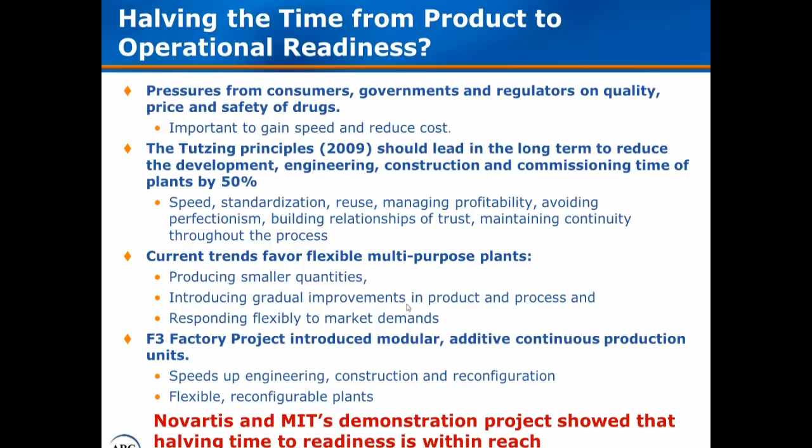Now, what will we be able to do today, right away? We need to get back one slide. If you can help me, please, with that. I'll take care of that, Valentin.

What we can do today is learn from the work that has been initiated by Dr. Thomas Tauchnitz at Sanofi. He published a vision in 2005 for integrated engineering, commissioning, construction, and operation. The principles he defined were that every asset information should be generated and maintained at one single location, that all trades during the project should work with the same up-to-date information, and existing knowledge should be reused where possible, which implied modular engineering methodologies.

I will not dwell on it, but there is a very sophisticated methodology defined by Mr. Tauchnitz that everyone can adopt. However, it takes a little bit of time to adopt it.

Another point that he came up with was that a risk assessment during the engineering can be very efficiently linked via requirements management to compliance management. So you design the plant, you identify the risks, and then you make a checklist of tests to do, and once these pass, you basically have the compliance in a single environment.

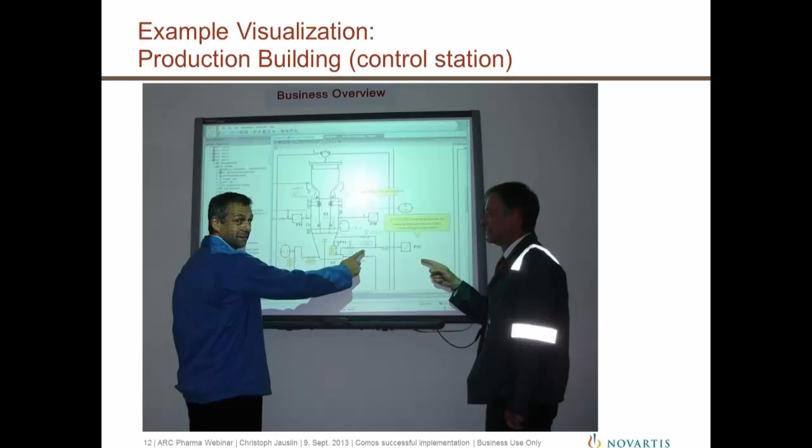I have an example here in production sites, what they are doing. They have such panels, such screens on the shop floor where they can have access to their data, and in this technology they can also do red lines, they can input commands, and are so in contact with the engineering department online. That's one of the examples.

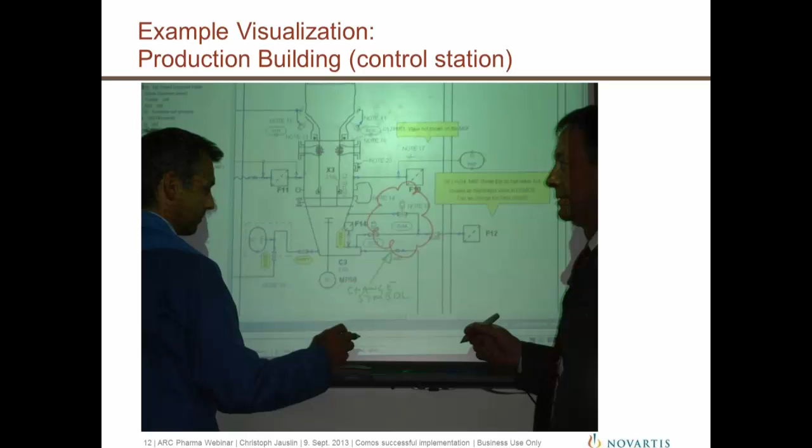Okay, now for going this electronic way, you have to change the way of working. Simplifying engineering workflow is one of the thematics, the reducing of the number of interfaces. You see here a very complex picture of an engineering workflow with all the documentation which have to be created, with all the disciplines, and what is possible with such an integrated platform is a much simpler picture.

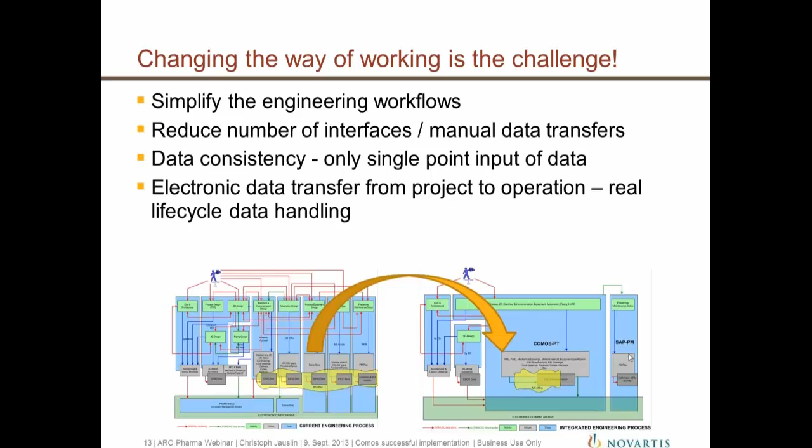You see here we have the Comos platform and we have the SAP beside for the maintenance. With such a concept, you can get data consistency. You have only a single point of input of data. Here you get the real integration with such a picture. But you need really to change the way of working.

What have we done? We have a centralized implementation. That means we have one database for all the sites. We have a global harmonized standard, so from China to California we are using the same data model. A very high integration level, minimum of interfaces, and with any rollout to sites, we try to migrate as much data as possible. If data are in electronic form, we can do it automatically. Otherwise, we do also redrafting in India.

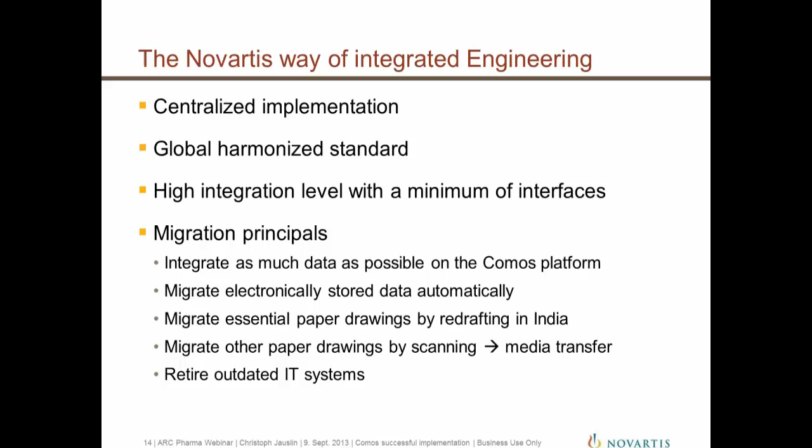Where we are at the moment, we have a lot of modules of Comos in use. So all the process things like equipment definitions, P&IDs, E&I with loop diagrams, HVAC, and then the modular technology, where I have some other slides. We have an SAP interface, and the full set is validated. We have an electronic signature possibility. That's all in. That's the engineering part, and we are then also using an integrated document management part, where we have also this qualification area, which I will explain a little later.

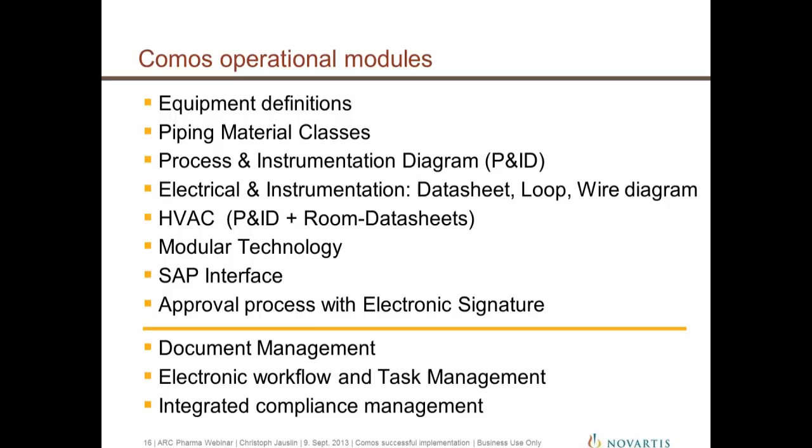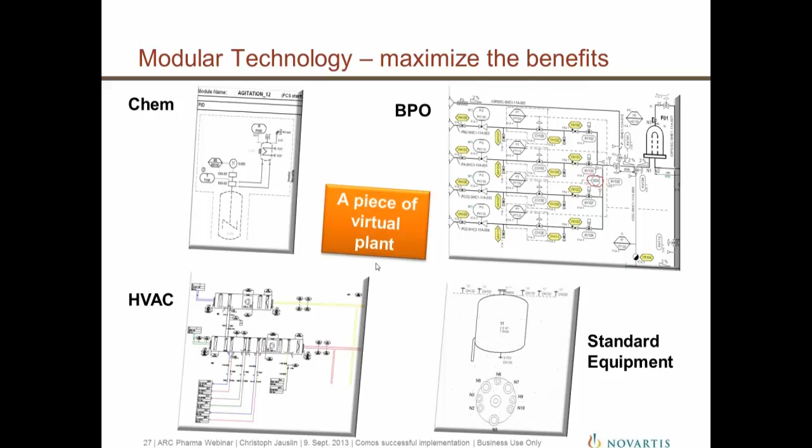As an example, we have one for the chemical part, a biotech part, HVAC, mechanical, so different areas, and we are not only defining a piece of graphics, we have data behind, we are defining assets, so in principle we have a piece of virtual plant. Looking at such a P&ID picture, it's not only these graphics, not only these components. For any of these components, we have an asset in the database and we have definitions beyond. So if we copy such a module, we are copying a piece of plant here on the right side. That is the high quality of these modules, process plus E&I in one box.

And also in the definition of such a module, you find the design specification, the functional specification, E&I specification, and it also ends with test documentation. That's a full set of such a module.

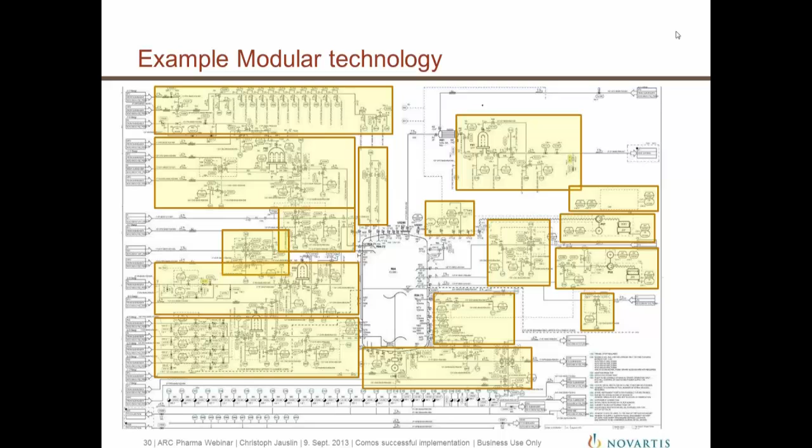And I have here one of the examples, a P&ID of this biotech project, and you can see with the next click how many modules were copied together here, and you see nearly everything on the drawing is out of a module. We have a main reactor and all the other parts are defined in modules. That is one of the best examples we have where module technology was really used in detail.

Okay. This thematic integration of qualification and compliance management into the platform as well.

You know, all the qualification tasks, it's really a lot of paper normally, and this paper effort we wanted to integrate into the same platform where we handle the engineering data. Having a look at the process, in the initiation and design part we had a really good tool. We could use modular technology. We have in all the phases, basic design, detailed design, our tools, and at the end of the process for maintaining the data we could also use the platform. But here, especially in the qualification area, we had nothing.

And so we started with a project to fill this big gap, and this integrated compliance management part was developed together with Siemens. So it's an extended document management. We have workflow-based processes, test plan management, and a so-called risk-based approach. This box, that is the extension PQM in COMOS, which is existent. We had also the part MROM, which we had to extend.

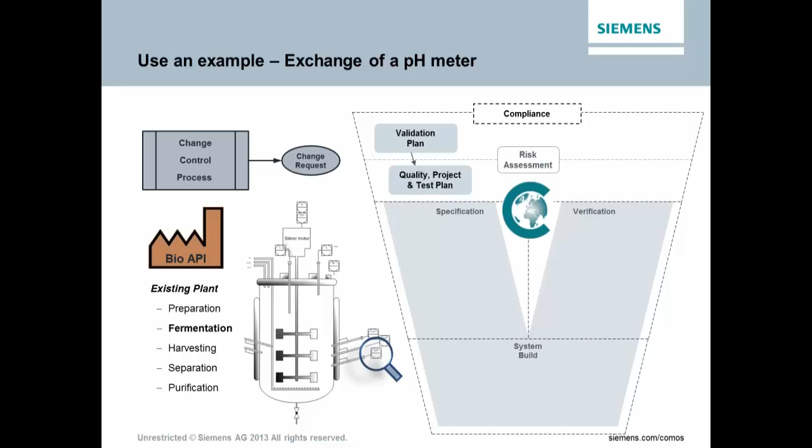To summarize a little bit, what is the challenge? We will start here to review a little bit, for example, in the bio API plant, and have a review to a fermentation, and what does it mean to exchange something here. For example, if the pH meter will be exchanged, for example, on a request from a change request, then you need to review first of all the specification if something needs to be rewritten, and if you only exchange something, obviously you need to implement and plan the implementation and the realization.

For example, exchange of a pH meter, you must do the exchange of this pH meter, and obviously you need to verify what you have done, and this needs to be according to the specification which you have defined upfront, and this needs to be reported and documented properly and reviewed and approved according to the guidelines.

And if we review this in a current environment, and that's more or less the starting point from Novartis as well, and this is very similar to the starting point of other companies, not only pharmaceutical companies, we see the different disciplines from process design more or less into the operations part, and we see this obviously in the engineering arena and resulting then in the operation area.

For example, the implementation of a new project will take 2 years, 3 years maximum, but if you are then doing your operation, you will have operation mode up to 20 years and longer. And obviously, if you have the data integrity not established over this long period of time, the issues arising out of this will increase over time.

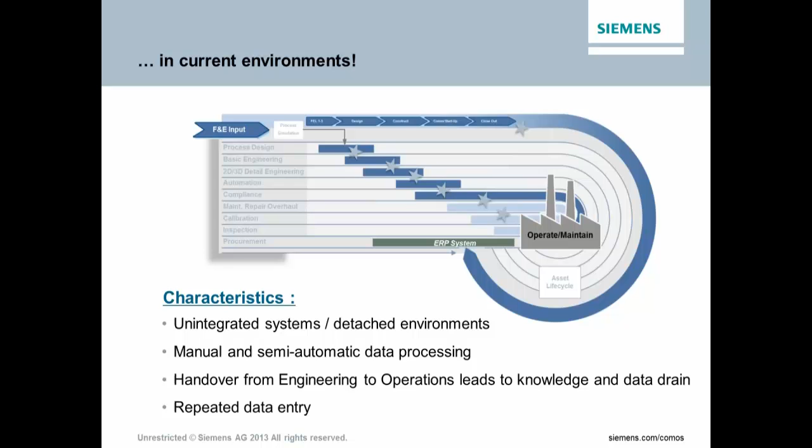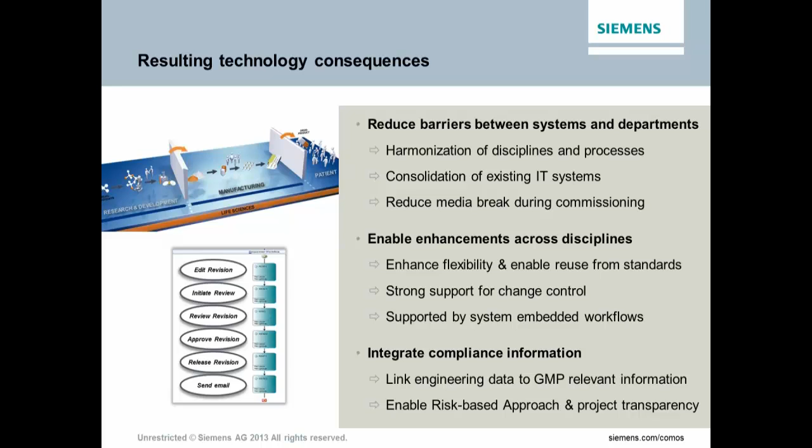And what could be done, that's explained already very well in the presentation of Christoph. You need to reduce barriers between the systems and departments. You need to enable enhancements across disciplines, and to integrate the compliance information. During the analysis, a big question was: could we reduce time to production? And obviously, it is possible if you really have a big eye on the compliance information which you need to follow. And if you have this integrated, then there is a chance to really speed up over time.

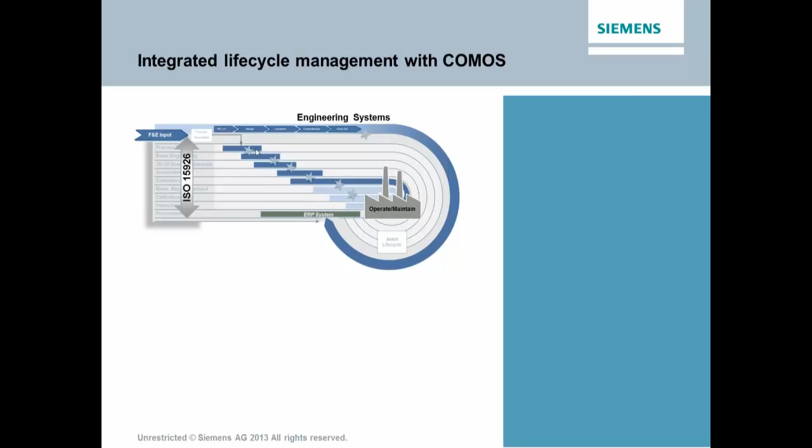Let's review this in context of the system. That's the picture where it is shown that you have all of the barriers between the different departments. And our approach is really to have everything in one environment. The example from Novartis was mainly in the engineering area, but it was across the complete operation lifetime. If something needs to be changed, then the data is every time up to date, and you don't need to search if you have the right data and so on.

This introduced obviously the reduction of the number of applications. It enables a single information hub and obviously enhances security and safe operations at the end. To focus, and sorry, I will get back.

The point which I would like to make is our customers start with implementations, for example, very often in the engineering phase, but we have as well several customers which are focusing more on the operating phase. It is highly important to identify where the best need and the best advantage is for you, where to start, and then we will find out and have a plan to implement the environment in a proper way.

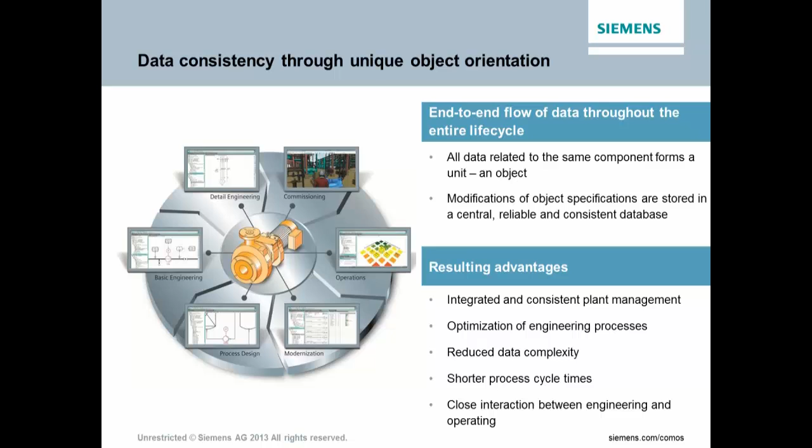And if you have changes, all of the resulting changes could be identified very easily. And that's our main architecture, and this has potential to save across all of the lifecycle phases, in the CapEx phase, handover, as well as in the operation phase.

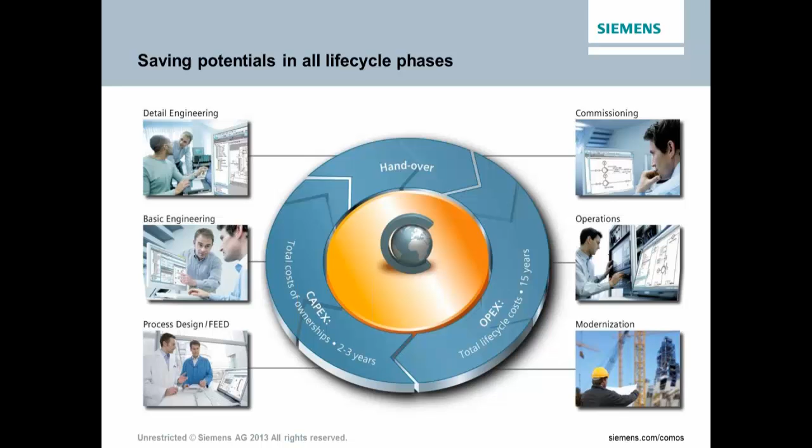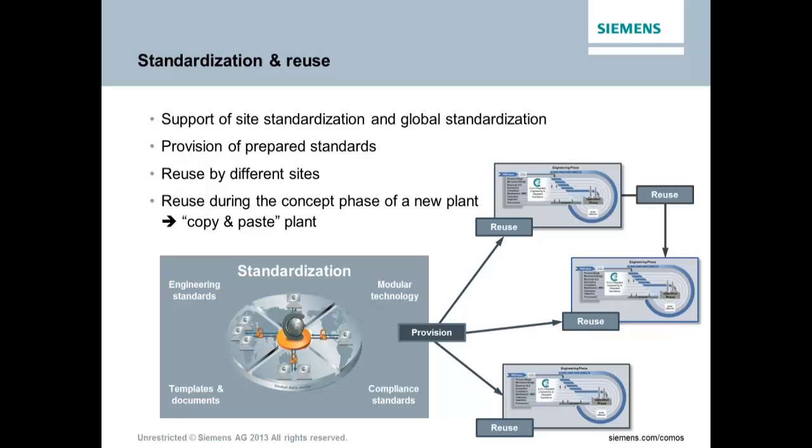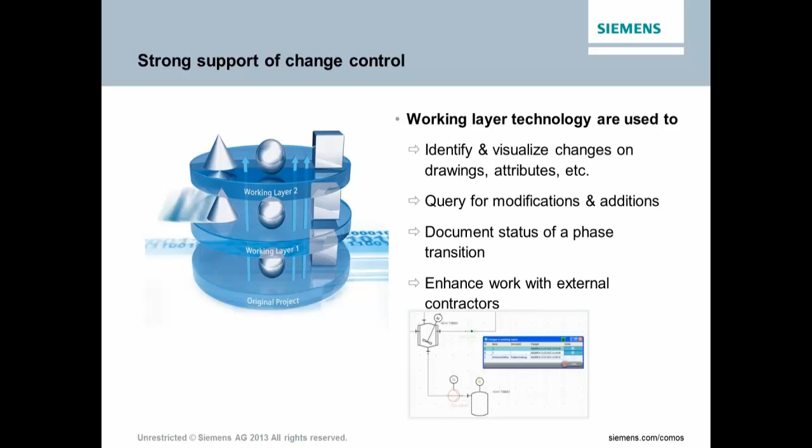Next point is a very strong functionality. It's called layer technology, and the layer technology supports the change control very well, because if you have, for example, established an environment and now you need to do some changes, in COMOS you can establish a new layer, doing the changes on the layer, and you see this in the pictures on the bottom. All changes are visually highlighted, therefore you can identify very fast what has been changed, and you can document this in the complete documentation of the change. Very strong feature here.

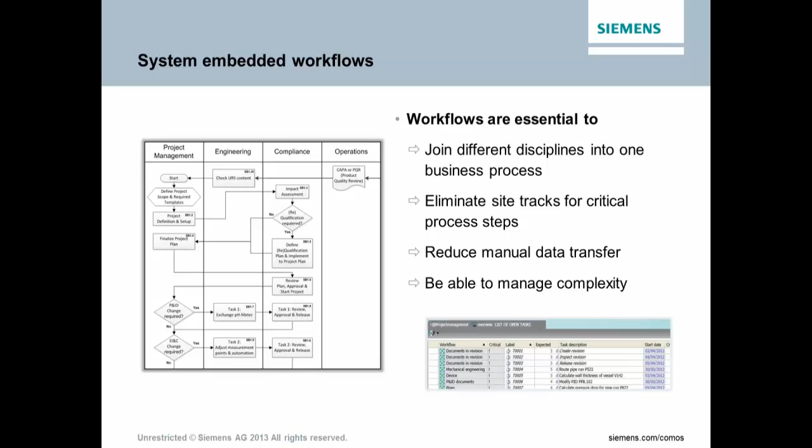The glue between all the things, I say, is a workflow, and Novartis is using this task management functionality as well. That means you define the task, what needs to be done, and the system ensures that the task will be delivered across the different workflows to the right persons. And to explain this a little bit more in detail,

before, you have a project, and for example, it could be a greenfield project, which is very big and a big planning effort. You could have a modernization, a revamp, and depending on which kind of project, you can choose a document catalog. That's already a predefined set of information and documents which need to be filled out, and you can assign a team list directly to it. Roles, for example: you assign users to the roles, and you say which role in my organization or in my project has which responsibility, and who needs to review, approve, or create the document.

This is, I think, standard project management functionality, but in COMOS you are able, and we have seen this in Christoph Jausin's presentation very well, to automatically link the plant information to the project information and you don't need to copy it around, and that's a very important thing to do. In addition, if you have already defined the framework of this project, you only need to enter the milestones when you need to deliver what, and then you have a good and strong tool to really have project tracking functionality established.

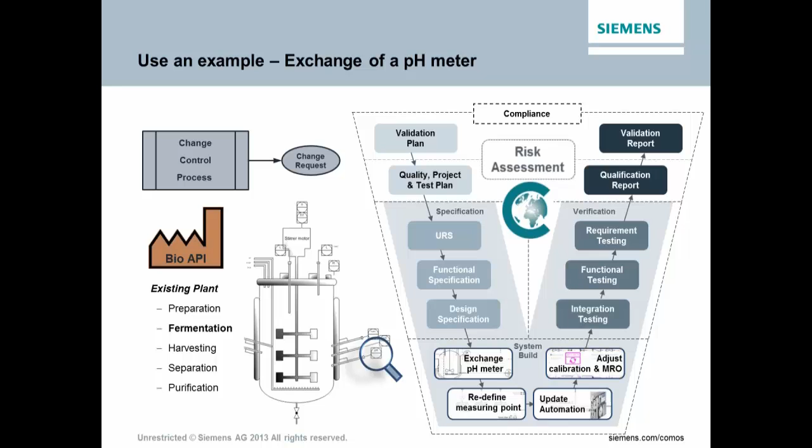What is really the important thing is COMOS is a lever for you to have a single source of information, to enable reuse by standardization, to have efficient asset lifecycle management. You can embed your compliance management in the engineering and operation environment, which is an enabler for a complete paperless electronic lifecycle. And this enables you to have ongoing plant optimization. And this will obviously reduce your cost. And a very important thing is you can, with this technology, retain key knowledge.